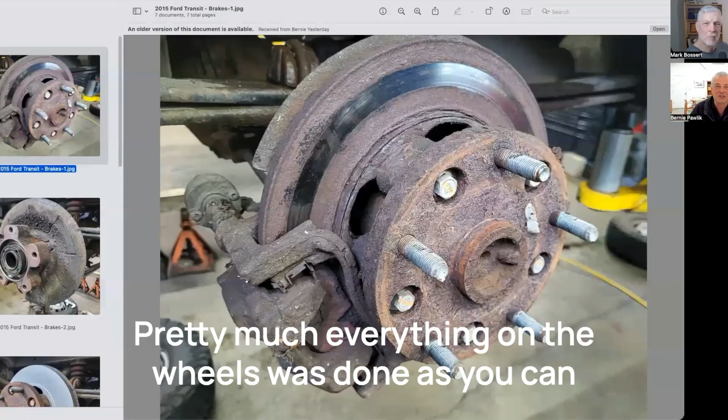Yeah, so the owner's complaint was the brakes were grinding. Technician went for a road test, heard the grinding. We put it up on the hoist and found some pretty ugly stuff. It's always a joy to take pictures and do a job on a vehicle when things look this ugly because you know you're making a big difference. So we can get right to it. The front and rear brakes were replaced. Pretty much everything on the wheels was done, as you can see by looking at this picture.

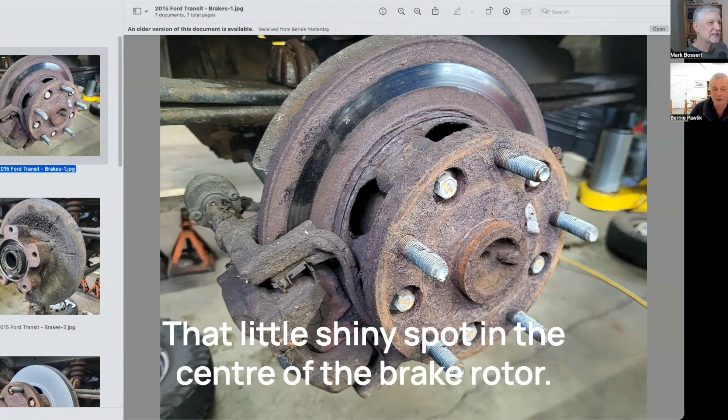Even if you've never looked at brakes, you'll look at that going, something just doesn't seem right with this picture. There's an awful lot of rust there. That little shiny spot in the center of the brake rotor that you're marking out there, that's supposed to be shiny all the way from edge to edge. And of course, as you can see, it's all rusted and the inside is just as bad or worse. So this thing needed a pretty major brake job.

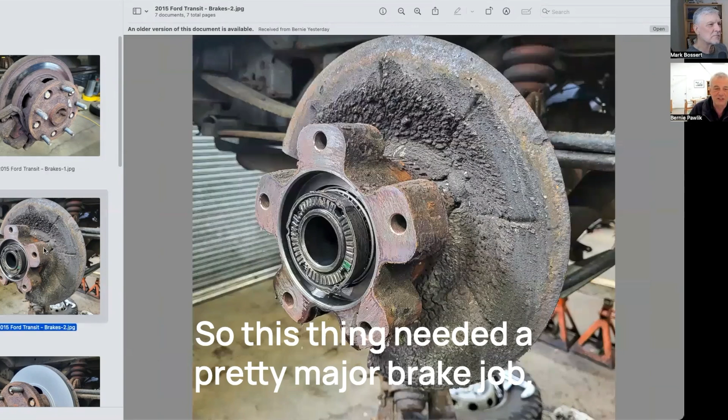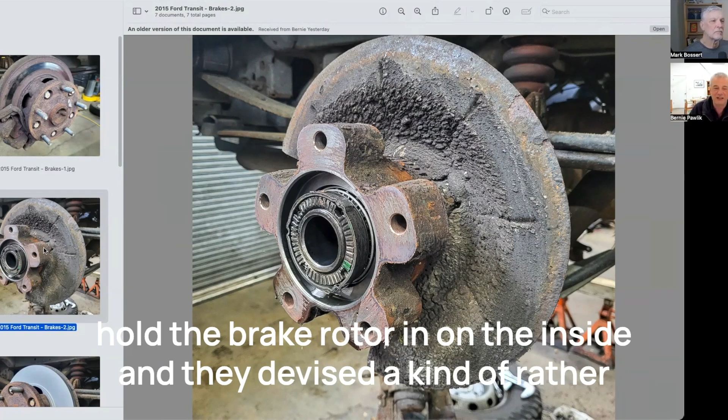What we're looking at here is a picture of the brake rotor removed. So these have kind of a unique design in terms of changing the brake rotor. A lot of times the brake rotor will just slide onto the wheel hub. In this case, you actually have to take the axle out. You unbolt the axle. The bolts that hold the axle to the hub actually hold the brake rotor in on the inside. And they've devised a rather unique way to twist the rotor out. If you can see some further pictures, you can kind of see it. But that's basically the rotor and axle removed.

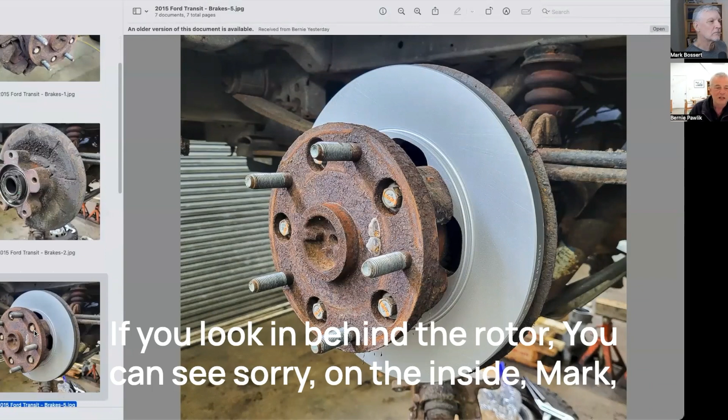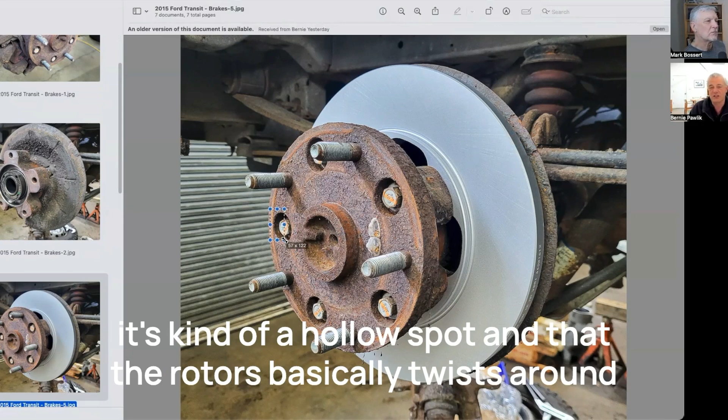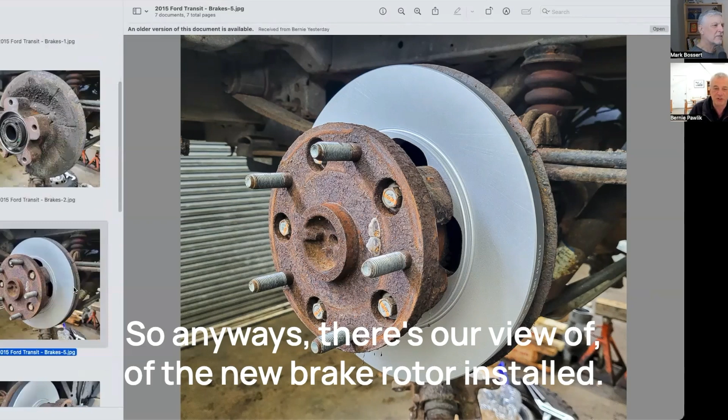If you look in behind the rotor, you can see on the inside, Mark, towards where the hub is, a little further to your right, you see kind of a hollow spot, and the rotor basically twists around that sort of flange in the hub. So they sort of made it easy, but it's still a bit of a difficult job. So anyways, there's our view of the new brake rotor installed. As you can see right away, things look a lot better. That rustiness of the axle really doesn't matter too much. It's not a problem. We'll go to the next picture. Again, we see another view of the rotor and hub and axle all installed and put together.

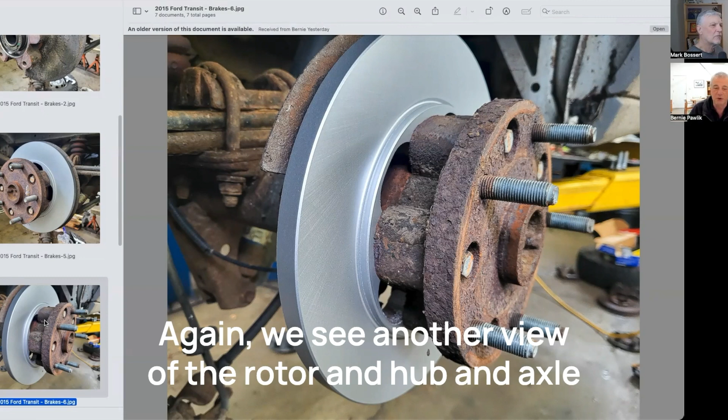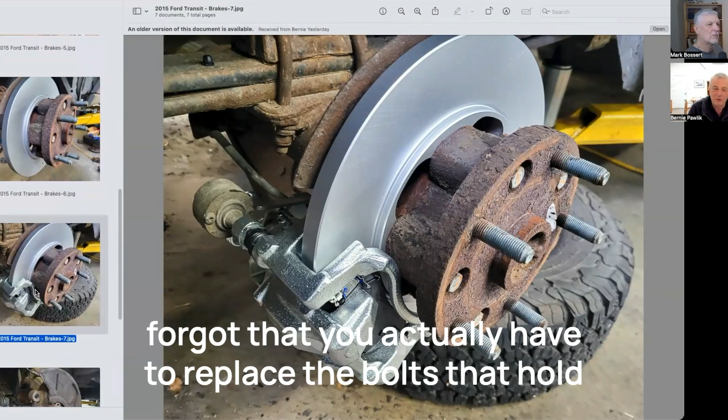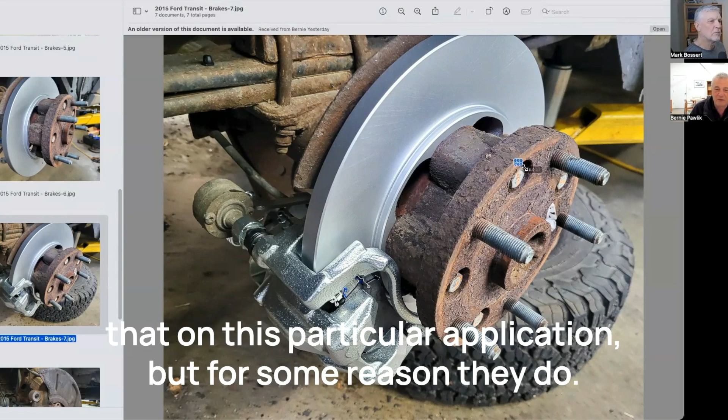One thing I will mention is we did put everything together and realized afterwards, I mean, we've done a couple of these brake jobs before, but forgot that you actually have to replace the bolts that hold the axle and rotor to the hub. These are actually one-time use only bolts. Not sure why they use that on this particular application, but for some reason they do. So yeah, those bolts there, that's not in the picture here. We changed them afterwards, but on the front and rear, it was required to replace all of those bolts.

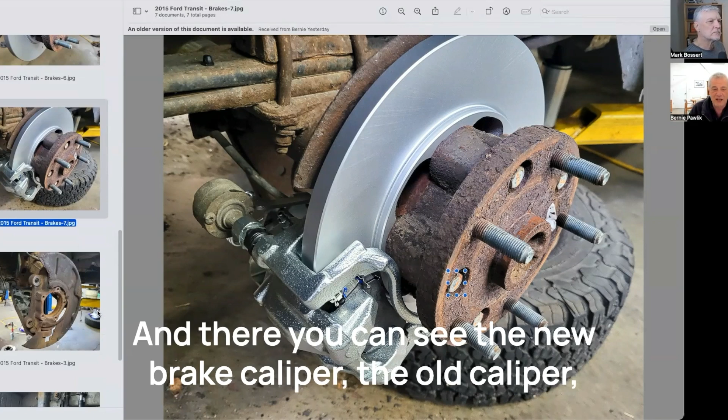And there you can see the new brake caliper. The old caliper, there was so much rust and corrosion, we just replaced it. You know, once you get rust that bad, it's going to get into the caliper piston and all the sliding parts, and never going to be redeemed with anything we can do in the shop.

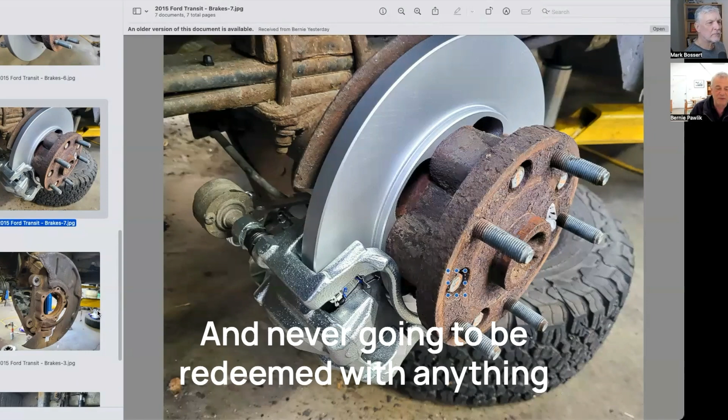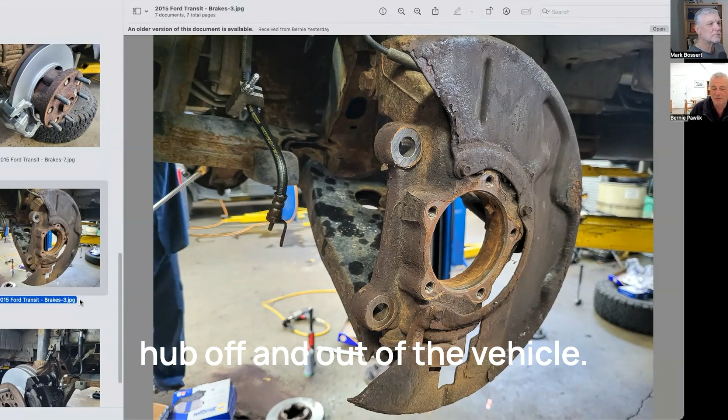So we buy rebuilt calipers and put those on. This is a view of the front. This is the front with the wheel hub removed. And interestingly enough, you actually have to take the wheel hub off and out of the vehicle to change the rotor. It's a captive rotor. It's inside of the wheel hub. So it's more robust and sturdy, but it involves more time and hence more cost for the customer to replace the brake rotor in this particular application.

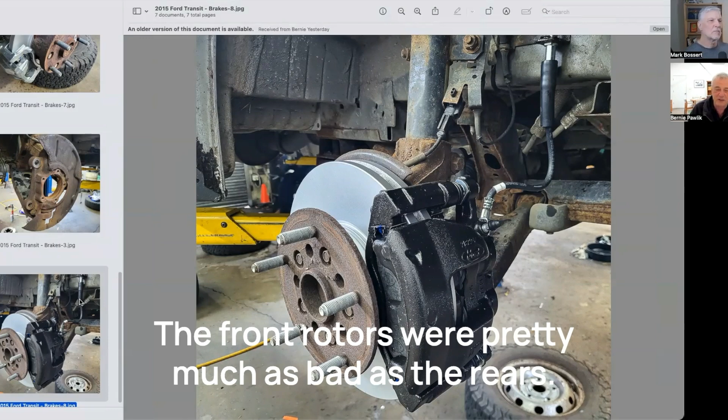And there we can see the front brakes. These are the installed components. The front rotors were pretty much as bad as the rears. Everything was just as rusty, but you can see the new rotors, the calipers. We replaced the brake hoses also, which were cracked and worn.

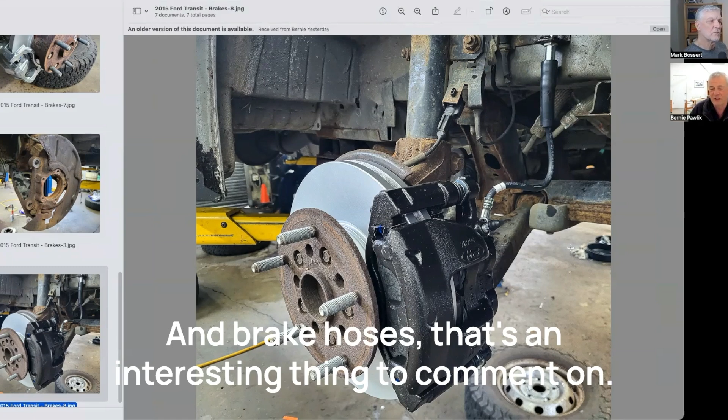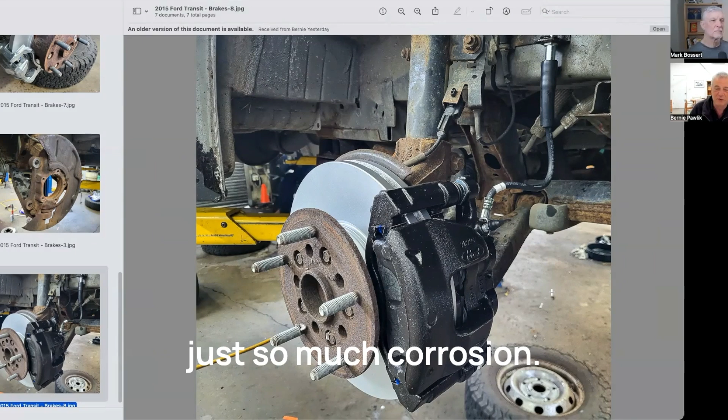And brake hoses, that's an interesting thing to comment on. We used to do a lot of brake hoses in the past. We don't really do them too often anymore. The quality of them is much better than they used to be. But again, on this vehicle, there's just so much corrosion. I assume it's mostly from road salt. It tends to wreck things, and the hoses were worn as well.

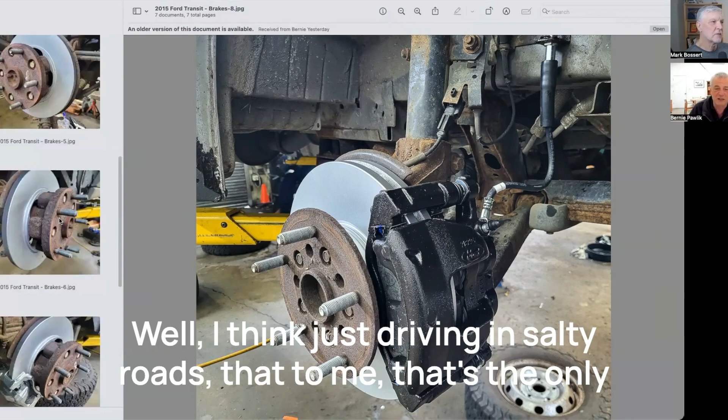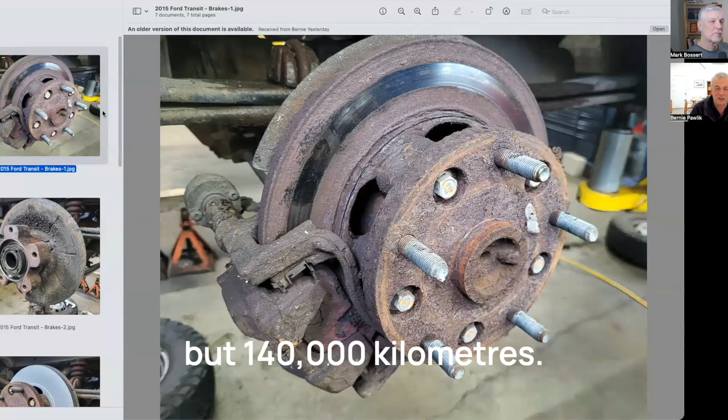So how did it get this bad? Well, I think just driving in salty roads, that to me is the only thing that's ever going to do it, unless the vehicle's been dipped in salt water. But yeah, that's pretty much it. I mean, the kilometers are not that high on this vehicle, 140,000 kilometers. So it might well be that it was driven in the wintertime, then sat, and it just accumulates over time.

And if people aren't looking at it, having their brakes inspected, things get bad all of a sudden, and you keep driving, the brakes are fine, all of a sudden they're grinding and they realize they're not working very well. But up until that grinding point, you look at the amount of contact area of actual metal to brake pad, it's really very minimal. So if you have to stop in a hurry or you're going down a long hill, those brakes could be really dangerous. Right.

Road salt's just a fact of life. How do you prevent it from getting on the underside of your vehicle or do something to lessen the risk of this taking place? Well, you can't obviously prevent the road salt from getting there, but what you can do is flush out your vehicle after wintertime or even during the winter. You can get a hose in there and spray your brakes out.

It's easier to do in some vehicles than others. But getting under the vehicle and spraying everything out and even spraying the undercarriage of the vehicle is actually a really good thing. Some automatic car washes, and I don't think you could take a van this big through one, actually spray underneath the vehicle too, which is a good thing to do, especially in winter if you drive anywhere it's salty.

And the other thing too, of course, if the vehicle is driven in salty conditions and then it's parked indoors somewhere warm, that's a really bad environment. That'll really cause the salt to get in there and start eating at things. Yeah. Heat accelerates any kind of chemical reaction. That it does. And road salt eating steel is a chemical reaction. So there you go.